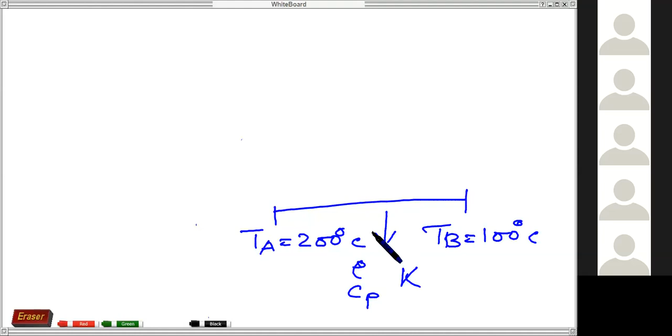So the problem is very clear. I have a one-dimensional rod. It's not looking like one-dimensional. Yeah, I can even draw. I will take a one-dimensional rod, and this is A, this is B. So let us say TA equal to 200 degrees Celsius, and TB equal to 100 degrees Celsius. And I know the metal property of this rod: rho, Cp, and K values are known. And let us say the length of the rod is 1 meter, for example.

Then this temperature is going to vary with respect to time as well as with respect to space. So that is called a one-dimensional transient heat conduction problem. On the first day, we have taken a steady state case where the temperature will not vary with respect to time, once the steady state is attained, and we solved it. Now we are going to simulate a problem which is transient or unsteady state in nature.

So for this particular problem, the corresponding governing equation is this one: dou T by dou t equal to alpha into dou square T by dou x square. This alpha is nothing but K by rho Cp. Cp is the specific heat capacity at constant pressure, rho is the density, and K is the thermal conductivity. So we know alpha. This equation can also be solved analytically. That is what one person asked, whether we are going to solve it analytically. Yeah, analytically we can solve, but that does not involve CFD.

So now we are going to solve this equation numerically. Numerically means we are not going to solve the PDE directly by the variable separable method or some other method, but we are going to convert the partial derivatives into the corresponding difference form, and we are going to write an iterative code to solve them. That is the idea here. So now it's very easy to write the right hand side.

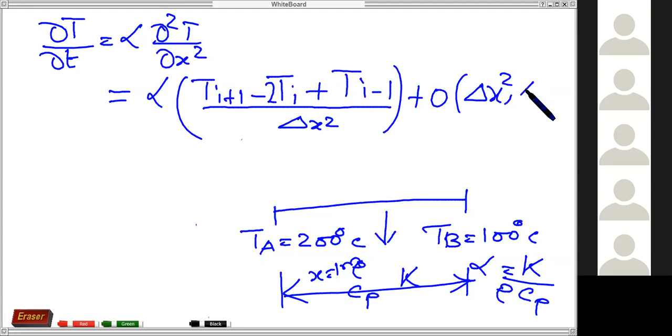So it is nothing but T I plus 1, sorry, not comma, it should be minus, minus 2Ti plus Ti minus 1 by delta x square, plus order of delta x square, comma delta t. That is, this expression I am going to discretize using the finite difference method with second order accuracy in space and first order accuracy with respect to time. Like that, you should be able to convert this mathematical equation into your own words. Okay. How to write the other side?

We are going to write the other side as T at n plus 1. N plus 1 means it's similar to ui plus 1 minus ui. So instead of ui, I'm going to write Tn. Here Tn represents the temperature at time t equal to 0, and Tn plus 1 indicates the temperature after some time delta t. It can be 1 second, 2 seconds, 0.1 second, anything. But it should be as close as possible to time t equal to 0. That is what we want. Divided by delta t.

And here we are going to find the value at the same nodal point. Here I should not be varied, so we have to put only I in both places. Don't put I plus 1 or I plus 2. We are going to find the value at the same nodal point. Then how are we finding the value? So what is the temperature at this x, let us say this is my I location. So what is the temperature at t equal to 0?

Then at the same location only, I am going to see what is the temperature after 1 second or what is the temperature after 2 seconds. So now you can imagine yourself, or I can draw a diagram like this. Let us say initially the entire temperature of the rod is 25 degrees Celsius, because for solving a transient problem, along with the boundary conditions, you should have the initial values.

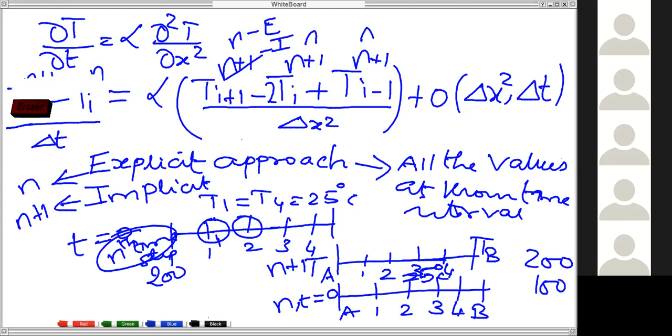Instead of n plus 1, if I put n, it is explicit. Instead of n, if I put n plus 1, it is called implicit. N means all these values are known; n plus 1 means all these values are unknown. That's the only logic. Even in the unknown, we may know the value at A and B. Once again, n plus 1 means implicit, n means explicit. So now let us try to solve this equation with the explicit approach. I hope you got the problem.

We could still discuss for another 40 or 50 hours, and even then we can't complete the entire CFD. CFD is an ocean. But I hope this is enough to gain confidence that you can study CFD from your workplace or wherever you are. Some basics are given.

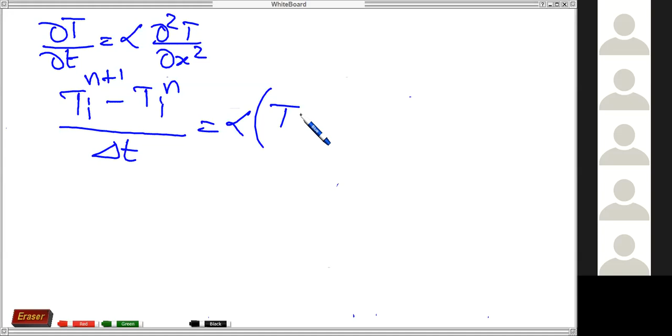Now I'm going to write Ti at n plus 1 minus Ti at n, because there's no variation in the x direction, only in time. N means time equal to 0, and n plus 1 means after delta t. Divided by delta t equals alpha into Ti plus 1 minus 2 Ti plus Ti minus 1 by delta x whole square, plus order of delta x square, delta t, which means second order accuracy in space and first order in time. And here I put only n, because I am now using the explicit method.

The explicit approach is very easy to solve. Okay, explicit approach. In this explicit approach, how many terms are there? Not variables: 1, 2, 3, 4, 5. Out of 5 terms, how many are known and how many are unknown? Ti n plus 1 will be unknown. Only one unknown. Only this term is unknown, whereas all the other terms are known.

Because whenever you see n, your mind should think that you know the value. Whenever you see n plus 1, it means the value is not known. So now there's only one equation and only one unknown. So directly we can solve it, isn't it? There's only one equation, only one unknown, so we can solve it algebraically.

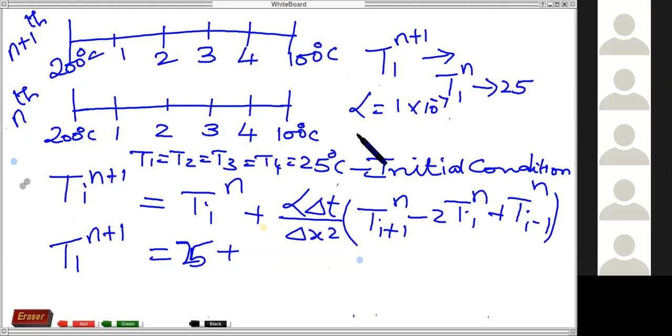Plus, what is alpha, the thermal diffusivity, generally given in the problem? I am going to give now. It is 1 into 10 power minus 7 meter square per second. Okay, that is the value of alpha. And what is delta x square? Let us take delta x equal to 0.2 meter in this case. And this value of alpha delta t by delta x square should be less than or equal to 0.5. So I'm going to take this as 0.25.

So what is alpha? Alpha is 1 into 10 power minus 7. Or even we can take a little higher value. Into delta t by delta x square, where delta x is 0.2 meters. So what will be the answer? Can you find the answer? Delta t equal to 0.25 into 0.2 squared divided by 10 power minus 7.

Or you take, yeah, nothing wrong. You can take it. 5 into 10 raised to 5. Now instead of that, you take alpha equal to 1 into 10 power minus 3. Roughly I'm telling, it's not right, but for our calculation. Let us take the alpha value, instead of 1 into 10 power minus 7, as 1 into 10 power minus 3. It may not be true, but simply for our calculation I'm telling.

What is delta t? 50 seconds. So we'll be able to find the temperature of the rod after 50 seconds using this formula. Generally this value is called R. I want to explain this concept also, so I will go through it once again.

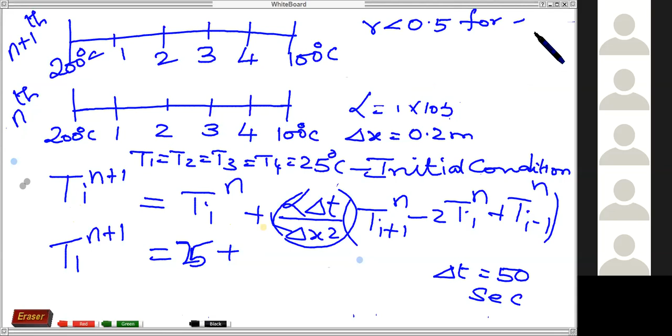So this value of R should be less than 0.5 for the explicit method. When you are going to use the explicit method, we cannot use R more than 0.5. It should be less than 0.5 only. Generally, it is better to take R equal to 0.25 or 0.3. I am taking 0.25. So R is alpha into delta t by delta x squared.

In the problem, alpha is given as 1 into 10 power minus 3. And we have taken delta x equal to 0.2 meter, because 0.2, 0.4, 0.6, 0.8 and 1. Delta x is nothing but the distance between two nodes. So when I find this value, I get delta t to be 50 seconds. So from the explicit method, I can find the temperature of the rod at nodal points 1, 2, 3, 4 after 50 seconds.

So Ti at n plus 1 equals 25 plus, what is the value of alpha? Alpha is nothing but R here. I should use 0.25, sorry. R should be equal to 0.25. Even though we can go up to 0.5, not exactly 0.5, less than 0.5, I have taken half of that value, 0.25.

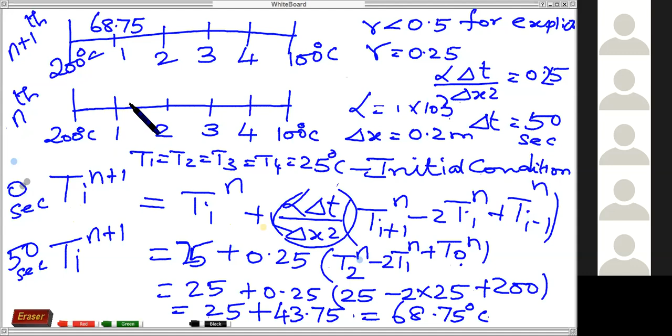For predicting this value, what nodes did I use? I used i plus 1, which means 2; i means 1; i minus 1 means 0. So for finding this value, I have made use of these three nodes. So I can put a bracket like this.

So if I want to find 1, I should know the corresponding values at the lower time step: 1, 2, and 0. One before, one after, and the same. If I know all these three values, then I can find the corresponding value at the current, or n plus 1, time step. Similarly, if I want to find the value at 2 at n plus 1, what are the nodal values I should know?

1, 2, and 0, 200 degrees, sir. No. 1, 2, and 3. Because for 2, in the previous step, one node after is 3, one node before is 1. So, if I want to find the value of the temperature at node 2 in n plus 1, I should know the values at 1, 2, 3. So, I can indicate like this.

Okay. I hope you got this answer. I will do it here itself, otherwise it will be very difficult for me. I hope I am not slow. If you're okay, I may go a little fast also.

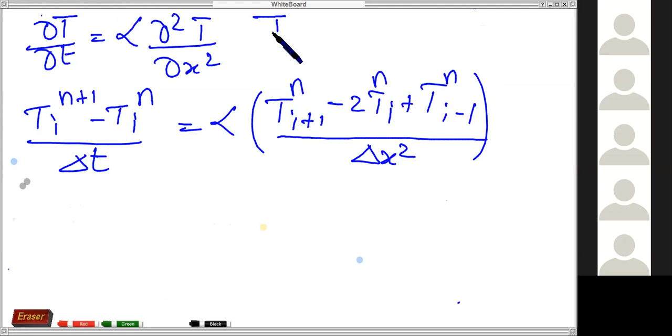You know that. But instead of writing n here, since n means the explicit method, now I am going for the implicit approach. The implicit approach is nothing but n+1. What is semi-implicit? There's another method called semi-implicit or the Crank-Nicolson scheme, where it will have 50% weightage for implicit and 50% weightage for explicit. I'm not going to teach it today, but I have the video, and if possible, I will try to share it with you. Okay, fine. So this is the one.

Now, I hope you can imagine the diagram we had drawn earlier. Now, how many variables are there? How many terms are there? 1, 2, 3, 4, 5. Even though there are 5 terms, you can see this term and this term are one and the same, isn't it? Both are Ti at n+1. So totally there are only 4 terms.

So totally there are only 4 terms involved. Out of these 4 terms, how many are known, how many are unknown? It looks like there are 5 terms: 1, 2, 3, 4, 5. But this term and this term are one and the same. So I can tell there are 4 terms. Out of these 4 terms, how many are known, how many are unknown?

Only one is known, sir. Only one is known. How many are unknown? 3 are unknown. Out of 4, one is known. This only is known, isn't it? Because it is n. Whenever it is n, it is known. Whenever it is n plus 1, it is not known. This is n plus 1, this is n plus 1, this is n plus 1. No need to put a mark here, because the same term is here also. I can combine them. So there are 3 unknowns and 1 known.

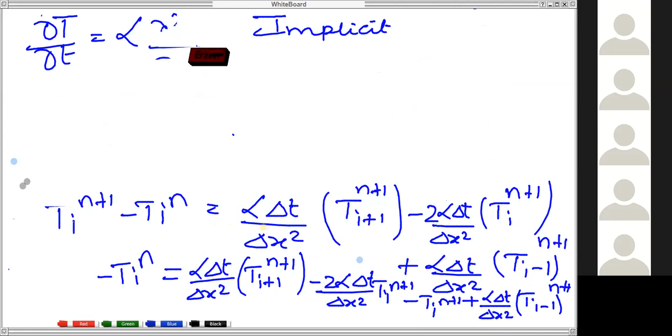Everything else is not required. We want only the final expression. So I hope you know what the implicit method is. In the implicit method, everything is at the unknown time step, which is n plus 1. Always keep in mind, n plus 1 means unknown values, which is nothing but your implicit method.

Sir, for these two methods, will the accuracy of the solution vary, sir, for explicit and implicit? Yeah, the implicit method is more accurate, but I can't say that openly like that. It will come through experience. In some problems, the implicit method is better. The implicit method has more stability, and it will converge fast. But it requires more work.

Okay, explicit method. If you are able to solve by the explicit method, it's fine. But if you are not able to solve through the explicit method, you may try the implicit method. That is what we tell the students. When the physics is much more complex, we ask students to solve with the implicit method, because the implicit method has more robustness in terms of stability rather than accuracy. Accuracy we have to confirm with validation values. We are always talking here about stability. Stability means when the solution is running, it should not blow away.

You should try to give some answer to us. That is sometimes what happens, meaning the solution will diverge. Instead of going to 10 power minus 4, all will go to 10 power plus 4, and the computer will tell you, I am unable to solve the kinetic equation, momentum equation, because your errors are more. In such a case, the implicit method is more beneficial compared to the explicit method.

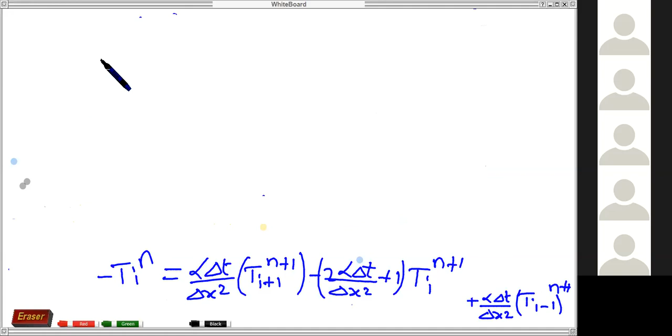Now I am going to write the same equation as capital A into T i plus 1 at n plus 1 minus B T i at n plus 1 plus, can I put C? Can I put C? Not C, sir. A, sir. Both the same.

Here also it is alpha delta t by delta x square. I am putting A equal to alpha delta t by delta x square. This is also alpha delta t by delta x square only, so I have to put A only. So A into T i minus 1 at n plus 1. Why I put B? B is nothing but 2 into alpha delta t by delta x square plus 1. So this value I am calling B.

Why am I calling them A and B? Because alpha is a constant, delta t is a constant, delta x square is also a constant, similar to the r value we mentioned earlier. So these values are constant. So I am putting A, B and A, which is equal to minus Ti at n. Are you okay with this equation now? Any doubt? How to find A?

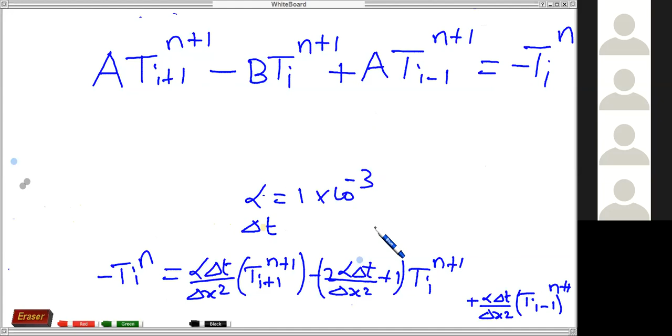As in the previous one, they have given alpha equal to 1 into 10 power minus 3. What is delta t? We have to find it out. What is delta x squared? Delta x is 0.2 meter as in the previous one. But here, we can even take the value of r to be 0.5. Your answer will not be wrong.

Last time I told you, we should take the value of r less than 0.5. If you take 0.5 or above, you will have erratic answers. Say we are working between 100 and 200 degrees only, but in the answer you will get 500 degrees, sometimes minus 50 degrees Celsius. So we get erratic answers in the explicit approach if we use r equal to 0.5 or more than 0.5.

But in the implicit method, you can still use an r value of 1 or 2 also. But they are asking us to go with r equal to 0.5. Still, if you want faster computation, you can try even 0.75, or 1 also. But generally, we are allowed to go at least 0.5. So that is the advantage of the implicit method. When I take r equal to 0.5, I will erase this and do it.

So R equal to alpha into delta t by delta x squared equal to 0.5. So what is the value of delta t? Delta t now will equal 100, because when we had 0.25, we got the delta t value to be what? 50. This will be twice. So we can simulate after 100 seconds directly.

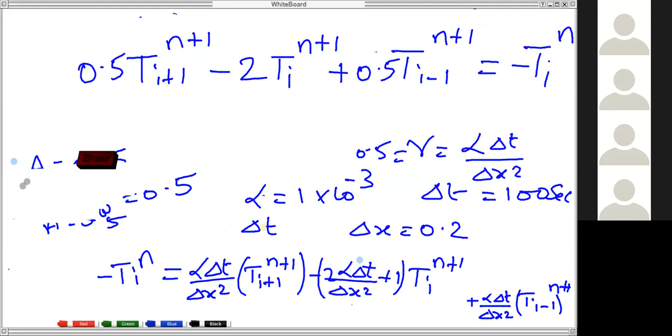Now I will draw the diagram. Now it is N, N plus 1, and N plus 2. N plus 2 is not required, but for your understanding I am writing it. A and B will always be 200, and I'm trying to attack the same problem with the implicit method, 200 and 100. So 1, 1, 1. It is 2, 2, 2. It is 3, 3, 3. It is 4, 4, 4.

Now which one are we going to find in this equation? Do you want to find the values at n? No, we know all the values at the n time step. That is T1 equal to T2 equal to T3 equal to T4 equal to 25. So now we are going to find the values from here to here. So let us call these 1, 2, 3, 4, for I equal to 1, 2, 3, 4.

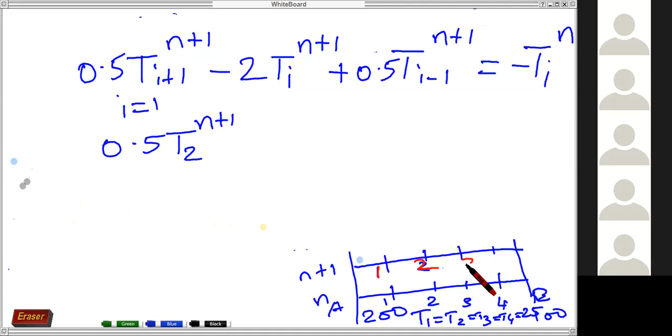So this T2 here, which is also not known. Minus 2T, what do I write here? T1, because i is 1 at n plus 1. So what does it indicate? 1 in red color. Plus 0.5. What is T1 minus 1? T0. T0 is TA. Where is TA here? 200. Yes, 200. But here also we know the value.

Yeah, TA at n plus 1. I am telling you the value is here and not here. Both will be same, but we are looking at the location only. So it is TA, which is your known value at n plus 1, equal to minus T1, because i is 1. Where is n? Below. What is the value? 25. This blue color is 25. So this value is also known, isn't it?

TA is 200. 200 into 0.5 is how much? 100. So you take it to the other side: minus 100, minus 25, minus 125. I hope you got it. I am a little bit fast, I will repeat once again. T1 at n is 25. TA is 200. 200 into 0.5 means 100. When I take this plus 100 to the other side, it becomes minus 100. Already there is minus 25. So minus 100 minus 25 is minus 125.

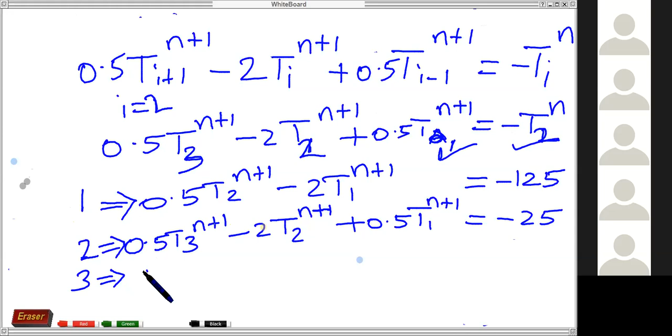Similarly, we have to form two more equations. I can erase because you got the logic. Wherever it is n plus 1, it is unknown. Wherever it is n, it is known. So there's no need of this diagram hereafter. So equation 3: now i equal to 3. From the governing equation, it becomes 0.5 into T4, since 3 plus 1 is 4, at n plus 1, not known.

Minus 2 T3, because i equal to 3 now, at n plus 1, not known, plus 0.5 T2, 3 minus 1, also not known because it's at n plus 1, equal to minus T3 at n. T3 at n means a known value, temperature 25. I hope you got the third equation also. Then let me come to the fourth equation. Now i equal to 4. So it becomes 0.5 into T5, 4 plus 1 is 5. 5 means the right hand side node.

Right hand side is nothing but TB. TB is nothing but 100. Any doubt how I put 100 here? Now I equal to 4, so I plus 1 will be 5. 5 is nothing but B. At which time step? N plus 1 time step. Even at n plus 1 time step, my boundary values will not vary, and hence my TB is 100 only. So I put directly 100.

Minus 2 into T4, because I equal to 4, at n plus 1, plus 0.5 into T3. Why T3? 4 minus 1 is 3, at n plus 1. N plus 1 means not known. Equal to, what is Ti? T4. T4 is also minus 25. Now what is 0.5 into 100? It is 50. 50, when I take it to the other side, becomes minus 50. So minus 50 plus minus 25 will become minus 75.

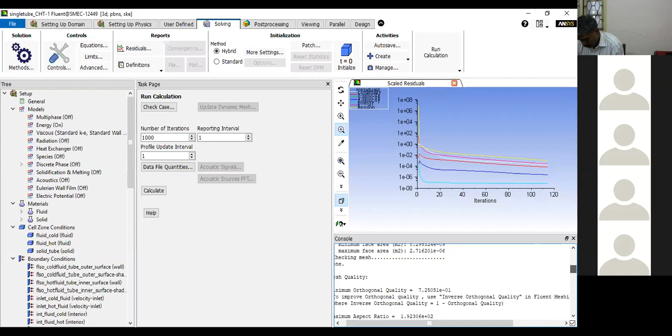Yeah, here. Continuity means mass. X, Y, Z, that is for momentum. Energy for the energy equation, which we have not dealt with because of lack of time. Then you can see K and epsilon. This was turbulence. And we can see the computer has taken a number of iterations and finally it has shown

solution is converged. Solution is converged means these two values are almost the same. It will be the same up to the fourth digit. So we can see mass is converged, U, V, W is converged. Energy you can see 10 power minus 8. And even K and epsilon have converged because there is no variation up to the fourth digit for K and epsilon.

There is no variation up to the seventh digit for the energy. There is no variation for the momentum as well as the mass. So we come to a conclusion the solution is converged. But how to set the case in Fluent, I'll come back to you from the beginning. If you want, I can also show the outcome, that is post processing, but there's no time.

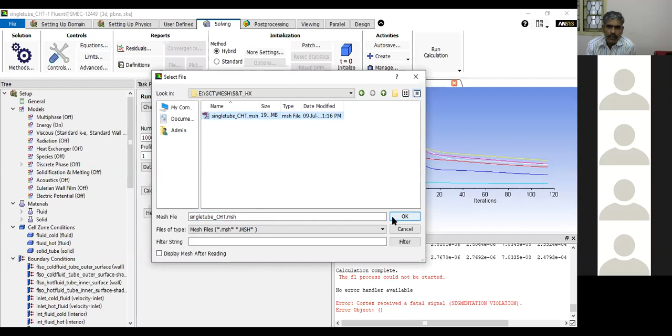So file, read, mesh. I'll be going real fast. Discard the case and data, read new mesh. Continue. File, otherwise I have to close and come. Read mesh. Yeah, it is there, .msh. So the file which is openable in Fluent is .msh, the mesh file. Give OK. No, it's not able to read because the case file is already there. So I will exit and open it once again. Then I'll share the screen with you.

It is Fluent. Yeah, so it is 3D. I will show the screen. Don't worry, I am about to open it. Then I will show you. I am sharing the screen. Here, share screen, and I'm going to share this one. I hope now everyone is able to see the screen.

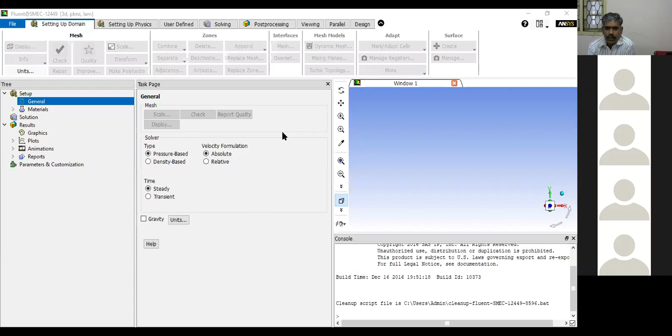Yes, sir. Yeah, file, read, mesh. So the file which is readable in Fluent is .msh. You go to the folder where it is. It is in E, this one. So .msh, OK. So now it is reading the mesh file. Now we have read the file, and you can go like this.

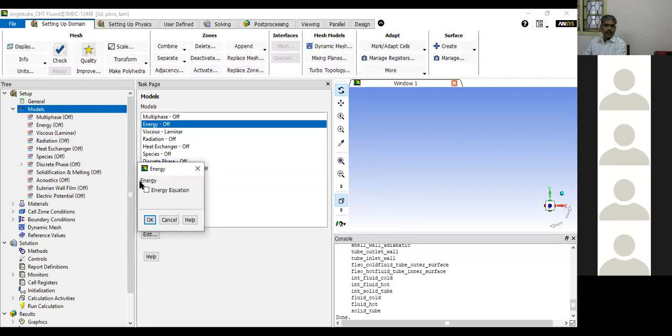Models: multiphase is not required because both are liquid, and even if one is liquid and another vapor, they're not going to mix. So multiphase is not required, but the energy should be on because heat transfer has to take place from the hot fluid to the solid, then from the solid to the cold fluid. So energy should be there. We have to solve for the temperature.

Viscous: definitely there may be some turbulence, because if I give more velocity, there's a possibility of turbulence. So I'm going to give standard K epsilon. We are unable to discuss the different turbulence models, I'm sorry. You may call me or ask me separately; I will be able to answer you to a certain extent. There's no radiation heat transfer. Heat exchanger off. Species off. Discrete off. All things off. That's fine.

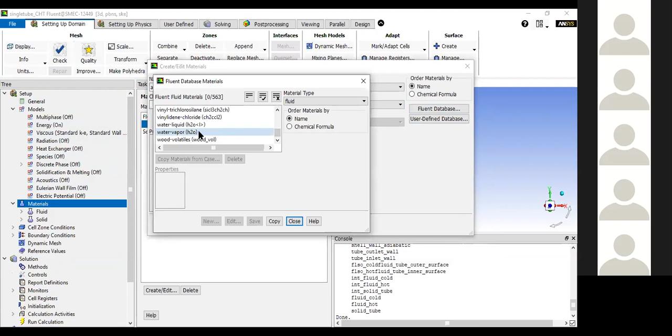Then you go to materials. In the fluid only air is there, but I'm not happy with air alone, so I want to bring in water also. I double click on air and the window is here. Then I go to the Fluent database and take water. Water has both water vapor and water liquid. I take water liquid, copy and close. Now change, close. Now apart from air, we also have water.

Okay, now compared to yesterday's class, what I have done today is through the inner tube hot fluid, I have sent the air, and outside I have sent the water. It can be anything. Both can be water, one can be air and another water, or both can be air. Whatever you want, you can keep it. So nothing wrong in that.

Similarly, for the solid, instead of aluminum I want to take copper. So how to make copper? Double click on aluminum. You go to the Fluent database. Still we are having only water. Why? Because it is fluid. You convert the fluid to solid. You take titanium, steel, or something.

Titanium, if you are going to put it, somebody will come and steal our heat exchanger. So better to put only copper. Even they'll steal the copper today.

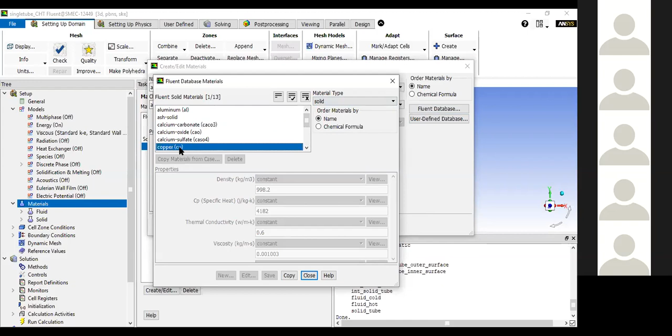So copy, close, change, close. Now you can see copper as well as aluminum for the solid material. For the fluid, we have water and air. So the fluid domain.

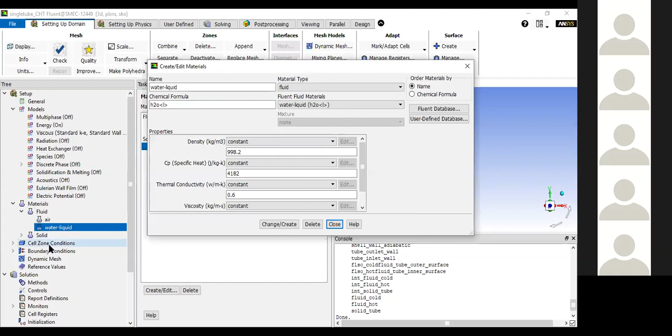Yeah, cell zone conditions. Here you can go to fluid hot and edit. What you want in the hot fluid, whether air or water? Let us have water. Better we can have water instead of air. I can have liquid water. Give okay. So in the hot tube I am going to send the water, and in the cold fluid I am going to send the air. Okay, it's possible.

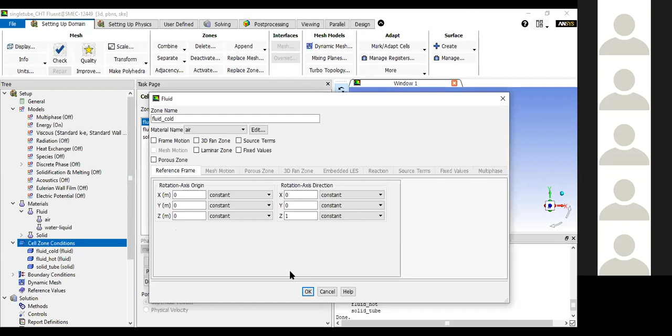Got it? What I'm telling? Just move down, you will get the answer. Slowly go step by step. After this, you go to solid. So which solid you want, aluminum or copper? I want copper, so you give copper. So now I define the fluid through the tube is water, the fluid through the shell is air, and the solid is copper.

Yeah. Then you come to the boundary conditions. Fluent is somewhat easier compared to CFX. For me, both are okay. Now we can see here the different boundary conditions. I will just go with the hot fluid inlet. I will change it. Here it is. Inlet hot fluid. So what is the velocity type?

Velocity inlet. Apart from velocity inlet, if you know the mass flow, you can give mass flow. But don't give other things. Don't even give pressure for water. It's better to give either mass flow or velocity. We can give mass flow as inlet for the hot fluid. Let us say the hot fluid is coming at 1.5 kg per second.

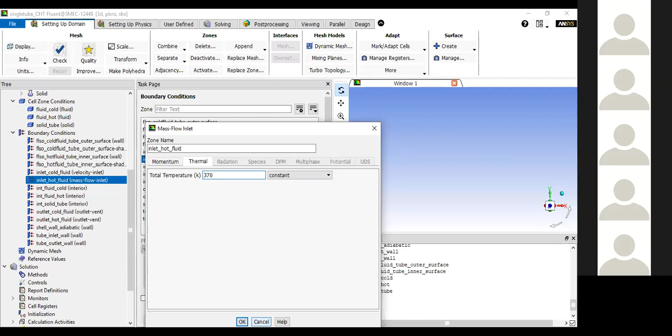What temperature is it coming at? It is not going to come at 300 Kelvin. It is going to come at 360, 370 Kelvin, because at 373 it will become vapor. So I'm giving 370. That is, the hot water at 1.5 kg per second is entering through the hot tube at nearly 97 degrees Celsius, equivalent to 370 Kelvin. Apply, OK.

What about the outlet hot fluid? Don't give outlet vent. Better prefer pressure outlet. As yesterday we gave 0 Pascal, here also give 0 Pascal. Thermal, don't worry, it is atmospheric temperature, so I am giving 300. If you are in foreign countries where the temperature is very low, you can use lesser values, but it will not affect much. Then we have completed the hot fluid.

Now let us come to the cold fluid inlet. The cold fluid is air, and instead of mass flow rate we can give the velocity magnitude. Let us say the air is coming at 0.2 meters per second or 1 meter per second, nothing wrong. What temperature? Let us say it's a cold one, 275 Kelvin, which is equal to 2 degrees Celsius. So air is coming at 2 degrees Celsius. Okay, that's fine.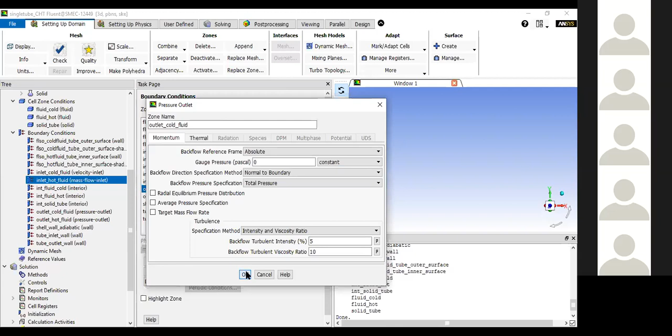Then we have to check once again. Yeah, thermal momentum is there. Give OK. Then outlet cold fluid. Yeah, this is outlet cold fluid. Then we can go for the pressure outlet. Yeah, the Pascal is 0. Give OK. That's it. Outlet, you give pressure outlet. That's it. Now shell wall is adiabatic.

Now the beauty of Fluent is there's no need to create any interface. As I told you in the morning, it will create a shadow on its own. Shadow means the other surface. So they both will create another surface, and automatically it will create the interface. So there's no need to create any interface in case of Fluent.

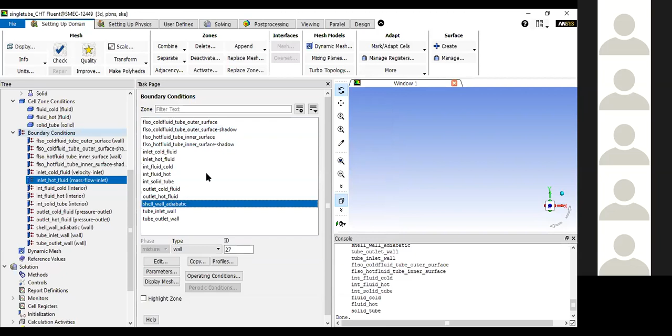One more point I want to tell. I have missed the general tab. In this general tab you can go for scaling. So now you can see it is in meters. So please change it to millimeter, and the mesh was also created in what? Millimeter. You give scale. If you are going to miss this one, the entire answer will be wrong. Now you are right, because

so we are having this 50. I hope now it's right. So don't forget to do this step. It is very, very important. Yeah, and if you want to check the quality also, you can check. Yesterday I told about the quality checking in Fluent. That also I am about to tell here. So you can see the minimum volume is not negative, it is positive.

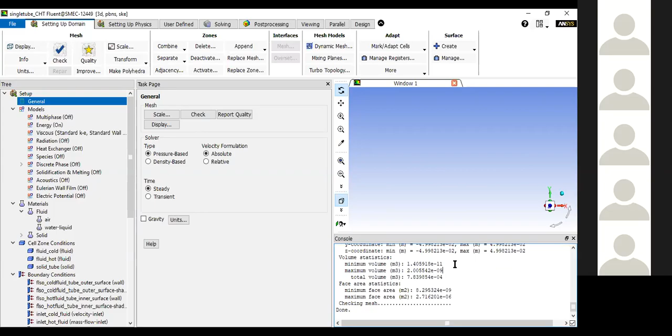Sorry, one phone call came, so the connectivity went. Yeah, this one and share. I hope now you can see once again.

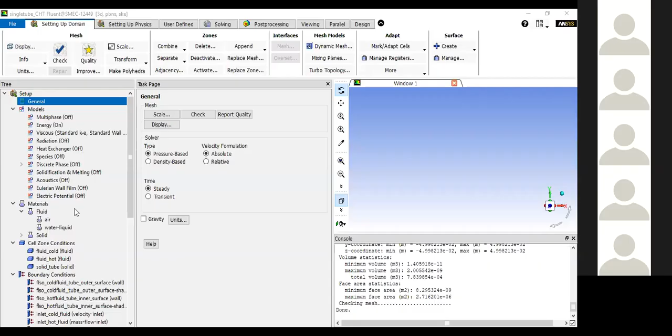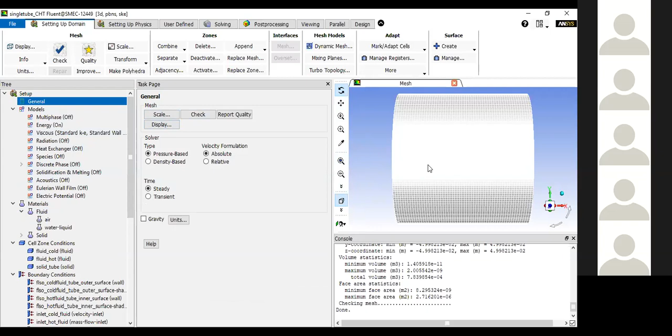Yeah, that's it. Now that is the point I missed there, and you can check the scale. And if you want to display, also you can display. What are the things you get? Yeah, close. And if you want to see the mesh, you can put this one. Yeah, now you can see. This is fit to screen, and this is rotate. If you want to rotate and see, this is the mesh we did yesterday, isn't it? So if you want to see the mesh also, you can see.

So after this, we are almost completed. Reference values, we don't change the values. Methods, here is the SIMPLE method. To explain this concept, I would have to take half an hour, so I'm not going to explain it now. Semi-Implicit Method for Pressure Linked Equations. How the continuity equation and momentum equation are going to combine with each other. How many variables are there in the momentum equation? There are 4 variables: U, V, W, and P. P is pressure.

In continuity, how many variables are there? There are 3 variables, U, V, W. Even though we have 4 equations and 4 unknowns, the pressure variable is not linked with the continuity equation. So we can't solve them in a proper mode. For that we need SIMPLE. One unknown is available in only 3 equations and not in the continuity equation. How we are going to solve all these things is explained by SIMPLE.

This is the easiest way. This is a very juicy way I can tell you, but you have to go very deep into that. Then you can see how we are going to solve it. Second order pressure, momentum, all these things we have to explain, but there's no time as of now. We are going to the controls. Controls also, don't change any values. It's a default value. It will work fine.

Report, whether you want to report some outcomes like what we have done yesterday for monitor points. Now I am not going to do it due to lack of time. It's not required also. Monitors, like what I told yesterday. It is going to plot the residuals and it's going to plot 1000. If you want, you can change 1000 to 10,000, but 1000 is more than sufficient because we know it gets converged by 100 iterations. You can see here the convergence conditions.

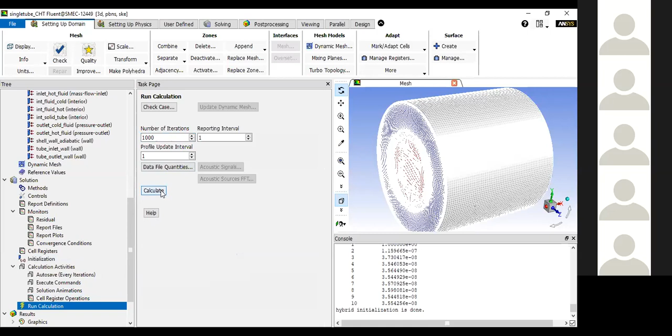Yeah, if you want to save anything, save after 100 iterations, like what I told you yesterday, to have a backup. Okay, that is the auto save option. Then we can go for run calculation. Yeah, run calculation. Now, how many iterations you want? I want some 1000 iterations to run. And if I give calculate, it will solve. It will start iterating. Yeah, now only it starts iterating.

You can see continuity is nothing but your mass equation. X, y, z indicates your momentum equation: x momentum, y momentum, and z momentum. So we have seen up to here. We have not seen the energy equation. And this also we have not seen. Turbulence, k-epsilon. Now this is nothing but the solver.

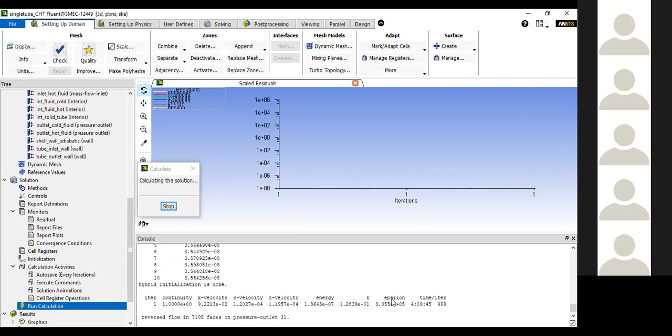Until now it is called preprocessor. Now the computer is doing some work. This work is called solving. It is solving the continuity equation, momentum equation, energy equation, and turbulence equation. After this, we can see the post-processing. Just like I showed, the solution converges. After that, you have to take the solution and check for the answer. I'm happy that I'm able to cover Fluent also.